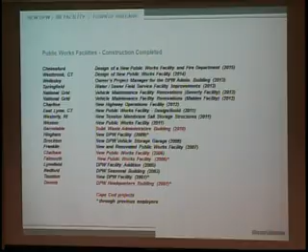And just to point out that this reflects all the municipal clients for whom we have done work regularly. When it's red, it means multiple disciplines, so you can see that our firm as a whole is fairly active on the Cape.

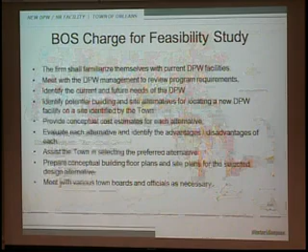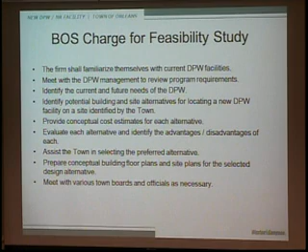The charge from the Board of Selectmen to us was to familiarize ourselves with existing conditions, develop a program which we refer to as the needs assessment, look at the available sites and identify the most logical site to develop a consolidated DPW facility, develop preliminary cost estimates, and develop some conceptual floor plans and meet with the various boards. The boards we met with, essentially we met with the Board of Selectmen on a couple of occasions. So that was the charge to us.

Again, you know this already. These are the existing facilities, Bay Ridge, Overland Way. I'll go through this with some photographs.

South Orleans, that is the address, Tom. It's 90 South Orleans Road. That's the address for the police station. The Water Department on South Orleans Road, Water Administration and facilities here in this building. And Tom's offices are across the street, and then the transfer station, and then 40 Giddiah Hill Road, which is where we spent most of our focus.

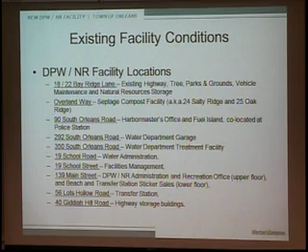That right now is sort of loosely organized with a series of miscellaneous buildings for storage.

This map is just to show you how they are scattered all around town. There are a couple of beaches that are occupied primarily or manned primarily in the summertime, but your full season facilities are literally scattered all around town, and it makes Tom's life a lot more difficult if he is to try to develop a strategic plan for managing the department in a way that's efficient and cost-effective.

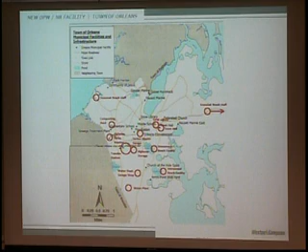That's the primary goal of our design, is to help Tom be a lot more efficient in the way he manages his staff and his resources. And it's very difficult now when you're scattered all around town.

So this is Bay Ridge, 18 and 22. Bay 18 is the small building where the parks and the beaches are. 22 is the larger building that has the highway department in it, the maintenance department, and there's a large metal building in between the two, which is shared by the two divisions, primarily for storage.

These buildings are totally inadequate. They're, in many cases, really falling apart, in need of a lot of repair, but it doesn't make sense to sink money into these because they don't meet their needs at this point.

One point I should make is that these types of buildings - this one was put up in the 1960s, I believe, is when it was constructed. They were designed for a different type of vehicle than is used today. The DPW vehicles back in the 50s and 60s were much smaller. They were generally single use. We now are dealing with much larger vehicles.

So the snow fighters have a hard time getting into those buildings, and some of his vehicles barely fit with having the door coming down. So it's basically, we run into this all the time - buildings done in the 50s and 60s are simply too small for the current vehicles.

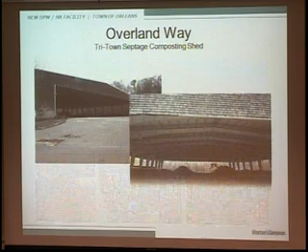Overland Way, currently informally used for some storage. It is in close proximity to a number of residences. So we did look at a proposal for reusing this as cold storage, but it was concluded that it's too close to residences, so that would be problematic.

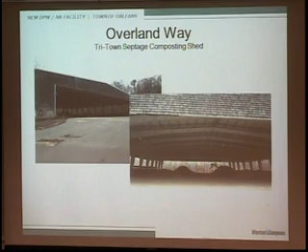The Harbor Master's facility shares the site with the police station. It's quite cramped. They do the best they can. They have one boat which they need to keep indoors, with the ability to get to the water in wintertime if there's a rescue to be made. There's a fair amount of storage and also a shop they use to maintain a lot of their equipment. It's quite tight. The fact that they're sharing space with the police station makes it quite problematic.

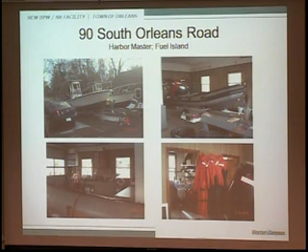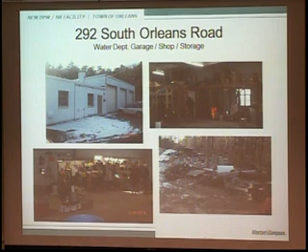The water department garage off of South Orleans Road is a single big space in this facility. We have workshops in there, the employee lunchroom, it's where they do their work. They do a decent job trying to organize it, but it really doesn't work well for them, and it's just not big enough. They mow their own facilities and cut the grass, and storage for cast iron pipe and larger pieces of equipment has to be outdoors—there's just no room for it. The water plant is really not part of our project, but just pointed it out.

Here in Town Hall, the water department is fairly well situated. They seem to have a pretty good setup there. From a management standpoint, it's unfortunate that the management is not where the workers are, because management can't keep their eye on what's going on, and it's more difficult to organize the day's activities.

Poor Ron is stuck in the assessor's office, so he really doesn't have a space to himself. It's difficult—he's got storage all around town, so that really doesn't work for him.

Across the street there are DPW offices, storage for the recreation department, storage for sticker sales, and the sticker sale room itself, which can be pretty hectic in the summertime. There are a lot of issues with the building—it's been repurposed for this use and isn't really well designed for these functions.

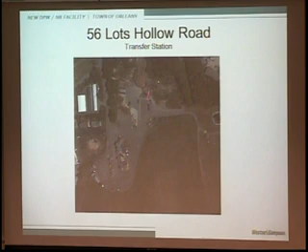Then you have the transfer station, which is part of this organization. 40 Giddiah Hill is actually over here. So just to reorient you, you come in here, and then there's where you turn around and put your stuff in. These are the buildings they have at Giddiah Hill, used by the highway department.

Some are literally sheds that are up on blocks, and some of them are permanent buildings. But in all cases, you can see there's been a lot of Rube Goldberg type accommodations in order to make things work for the staff.

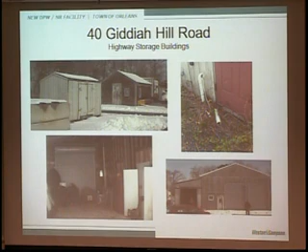The picture on the upper right is the garage across the way. So the staff, before they paved that parking lot however many years ago, ran PVC under the pavement from one building to the other and ran an extension cord through it so they could get power from one location to another. Now, how much can you run off an extension cord? Maybe a small hand drill and a radio, that's about it. So this is the type of Rube Goldberg stuff that has gone on—there's a lot of this around, and it's really, I hate to say it, kudos to the staff just trying to survive and get the job done.

So this is, I'm sorry—is that due to budget, that they did things like that?

Who knows? I mean, there's been no attention to the facilities, there's no budget for the facility, really, to do something. I'll tell you right now, while you asked that question, the parks down at Bay Ridge Lane is a blue metal building that's shared half by highway and half by parks.

So the back part by parks is heated—we heat it because they do a lot of indoor work. They maintain the lifeguard stands in the winter and do a lot of work there. Right now, that heat is broken.

We're trying to get parts to wrap it up, but it's probably like a $3,500 repair. For the last month or so, they've been heating it with a propane heater just to keep things alive. Some of the heaters—I forget the trade name—what do you call the overhead heaters, Mike?

Infrared? Not the infrared, the one that blows. Modines? Modines, thank you, yeah.

So we got a few of those in the garage, right? Well, one doesn't work at all, the other one doesn't work right, so it's on, off, extremely inefficient. I can go on for days about the condition of the existing equipment.

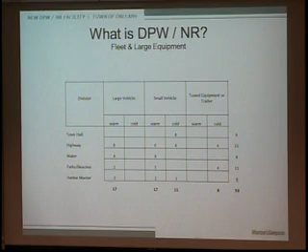One of the things I'll add, we are an emergency response operation. Right now, the immense majority of our fleet is outdoors because we don't have any room. We might keep a few, like the loader indoors because we want that to start and go. When the snow's falling, you gotta go outside, so you might have the loader indoors, maybe one sander and a couple of pickups. But basically, everything's outdoors.

I watched my guys struggle last year hooking up plows. You are wasting man hours like you can't imagine, particularly when the snow's falling and you need us out there. I saw my guys fight with one plow for 20 minutes last year, and it's like, you got to be kidding me. And it's because they're outdoors. In the middle of a blizzard, snow flying, they're going from a sanding operation to a plowing operation, but the key is, it's public safety. Every minute counts.

Another point to make is that pretty much every one of our DPW facilities has a warm garage for their larger vehicles. One of the benefits, most of them have center aisle angle parking, so every vehicle has a parking space. When there's a snowstorm coming, they put the sand and salt in the vehicle, they park it, it's ready to go. The staff come in, get into their truck, and off they go.

You can't put salt and sand into a vehicle if it's going to sit outdoors, if it's going to get rained and snowed on, because that's going to freeze and break the spreader. Because there's a chain device that pulls it through, it'll break it.

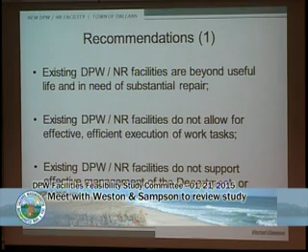So our recommendations are as follows. As I said, the existing facilities are beyond their useful life and in need of substantial repair.

It's not worth the money. It's not a wise investment to put any money into them. They don't allow staff to work effectively.

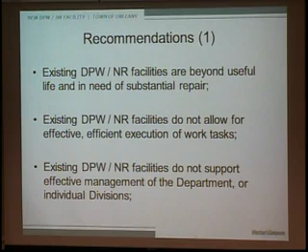That's quite simple, they don't support effective management of the department. Tom has an extraordinarily difficult charge in front of him in order to manage department divisions that are spread all around town. None of the existing sites is large enough to house a consolidated department except for 40 Giddiah Hill, which we can't fit everything there, but most of it we can fit.

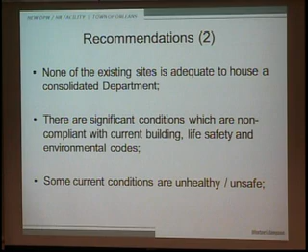There are significant conditions of non-compliance with current codes, you have building code violations, life safety violations, environmental violations, pretty much on every site. In some cases, particularly the highway maintenance garage, it's unsafe. There was one case because they have an emergency generator indoors. One winter storm not too long ago, one of the drivers came back and found the mechanic was woozy from carbon monoxide poisoning. So it's just simply unhealthy.

We also looked at all of the available commercial sites in mid-2014, and the list is in the book. They're either too small, in inappropriate locations, have abutter problems, or zoning problems. One of the benefits of Giddiah Hill is that it's in the industrial zone, and I've checked with all of the various departments here in town, and planning has agreed there are no issues there. We can put this facility there and you don't have any issues, and there's no environmental issues either.

So our recommendation is that 40 Giddiah Hill Road be developed as the core facility.

Another benefit is it's next door to the transfer station, so we can actually connect the two via roadways, so that becomes basically backdoor redundancy. So if there's a problem on Giddiah Hill Road, the staff can access the highway system through the transfer station. There's also potential for sharing of the transfer station site for bulk material storage, potential for sharing of staff between the various divisions, and there's a lack of environmental, abutter, or zoning issues there.

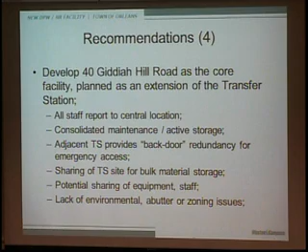We also recommend that we take down the Bay Ridge Lane structures. As we said, they're beyond their useful life. Our initial recommendation in the report was to construct a cold storage building on that site, which would be used for off-season storage of vehicles and equipment.

And as I said before, at this point we have no planned use of Overland Way, principally because of its proximity to private homes. And whose concern is that? Who are the individuals that are concerned?

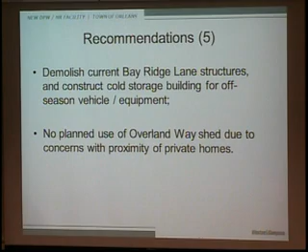Just the Board of Selectmen. The Board of Selectmen was concerned? Yeah, there was a comment by the Board of- and John, please jump in. There was a conversation with the Board of Selectmen during some of our presentations. There was no official vote taken by the Board of Selectmen, but there was conversation by the Board of Selectmen not to use it.

And it actually wasn't just private homes, it's also right next to Tri-Town, and there could be potential use for that site for a sewer program. So it's like, let's stay away from it. That was the feel, and if you want to jump in.

Yeah, there were two ideas on that. One is enclose the building that's there because it's structurally sound, and use that for cold storage. That was one idea. The other idea, because of the proximity to private property and the amount of potential noise, maybe we'd abandon that, but we have not discussed taking that building down or doing anything with it at this time, other than- I think we're storing gravel and stuff like that in it now to have some use. But that decision hasn't been made by the Board of Selectmen.

And Mike, thanks, that's really helpful. Mike, you saw that building, and that building has integrity, right? It's not- Yes, I mean, pretty simple. I walked through it myself and measured it, and I'm convinced that one could spend some money on it. A few bucks. I forget what the number was, but not too much to enclose it.

I was just going to enclose it basically in almost like chain link, but you could store a lot of stuff. It's a very substantial structure, and it could be very useful, but it's near homes and it is a magnet for kids. It's got a lot of graffiti on it right now. So I guess that was another concern, was it going to be even more of a magnet if there are trucks there. Just buy a dog.

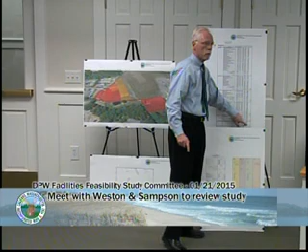The feeling at this point is that this represents an efficient program for your 8 divisions. We don't believe we've made any compromises that are going to impact operations negatively. But I was just anxious that you understand the kind of due diligence that we went through to get to the point where we are now.

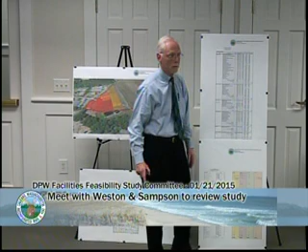Mike, what's industry standard atop? It says industry standard and then as developed. Industry standard meaning that comes out of, when we hear from the superintendent of the water department that he needs a workshop, we, based on what we've done for the last 10 years, have a sense that's basically a 600 square foot shop, or going back to our records of what has been built by other DPWs. We have Roger Thompson on our team, and he does this stuff in the Midwest as well, so that industry standard is our assessment of what is being built out there these days.

Is that 45,000 number, I noticed in your presentation, there's a lot of modular schematics for different functions. Is that 45,000 number reflective of the schematics of individual rooms? Right, that's what generates the 60,000. Okay, so then we went back to that, and we took some out, we squeezed them, and that's where we started. That was the starting point. But it's not—I'm trying to illustrate the process.

As I mentioned, this is our recommendation for a master plan, and that's a core facility at Giddiah Hill Road. This is Giddiah Hill Road here. So I think Nauset refuse is in here, I think.

This is where the Highway Department currently has a collection of buildings that we talked about. This is the detention basin that exists right now, which drains the cap from the landfill. This is the landfill, that's the transfer station, this is the gift house, and this is the area behind the gift house that's paved right now where they do some of the composting.

Our recommendation is, we went through a series of conceptual layouts, which I believe I put into the report, and this is the one that made the most sense to us. So you have an administrative wing here, where all the management and supervisors are located, the administrative staff are located. It's also where citizens would go if they need to do business with DPW, where folks would go to buy their stickers. And then we have this wing being the vehicle maintenance shop on the opposite side, and this right here is where the trade shops are going to be.

And then this building is the warm storage for vehicles. It's a center aisle with angle parking, you can see it in the plan. And then this little bump out is the vehicle wash bay. So you go in this side, wash, come out that back side, turn around and go back into the storage area. So what we've created here is a reasonable parking area that's exposed onto the street, so the building has a front to Giddiah Hill.

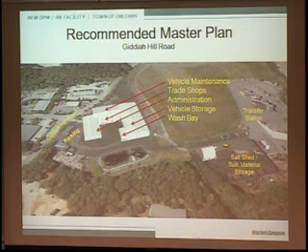Would the retention basin stay in the same location? No, we'd have to relocate it. Okay, move it over a bit. Yep, it changes shape from a rectangular to a triangular one. And actually it's not a bad thing, it does not function very well at this point, it's pretty silted up. I would think you could move it to an outer edge of the site and make better use of the space. Exactly, we slide it over, you just get it out of our way, but it actually needs maintenance at this point now.

And part of the proposed scheme, which is in the report, is, as I mentioned, we take down all the buildings at Bay Ridge Lane, and we put up a single pre-engineered metal building for cold storage. In this scheme, it's also center entrance with angle parking on either side. We can make modifications to that, but this was the initial scheme.

Yes, sir. Mike, what was the cost for that part of the project?

$1.3 million, for that building and for all the site work? No, that's just the building itself. And I have site work for that at being roughly $250,000 plus, $75,000 for demo of the buildings, plus that water shop is separate. Yes, it's all in here.

I should mention, when I say pre-engineered metal building, I'm talking about what some people call modular, but not really modular. Pre-engineered metal buildings are factory manufactured pieces. There's a large structural bent, which is long span, which is what we need. That building is 95 feet wide, and then you have rolled sections for roof panels and insulated wall panels. It's about 30% less expensive than traditional construction, and we're proposing the entire project be done that way.

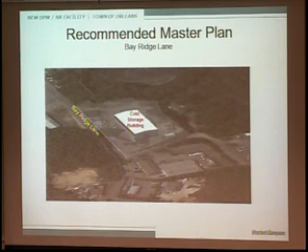Okay, great. If I may, the chair is having some conversation and questions about this. I'll bring this out, something I'd present to the committee in the future. First, the presentations that I've done and that Mike has done, I think we've been in front of the Board of Selectmen three times talking about the project, and we went through several iterations. For example, with Overland Way, we had an initial proposal to spend a little bit of money on it and take advantage of the 40,000 square feet. But again, this whole process is iterative. We're here to have a conversation, look at the best options, bounce out ideas, look at costs, and ultimately the town meeting makes a decision on what's best for the town.

But for Overland Way, just stating facts, when we looked at one of the first designs and Mike costed it out, we had about, in round numbers, $284 per square foot for the entire project across the three phases you can see over there, which we haven't talked about yet. But when we brought Overland Way into the mix and gained another 40,000 square feet at low cost, it drove the entire project cost down to $174 a square foot. So you take about a quarter to a third off your total project cost by utilizing Overland Way. We did present that, and we did talk about it.

Metal roofs—I want to emphasize what Tom just said, that this is a point in time. This is an iterative process, and I'm certainly not here to tell you this is the way to do it. These are ideas. What we're looking for is feedback from you, but we haven't stopped thinking either, so we have more ideas going forward.

I think all of us appreciate just how much work you all put into this. Sorry to come in the middle, but it's a lot of work. But we're glad that you're here—well, thanks—because you're going to sell the job for us.

I'm always nervous with my pickup coming out of here, worried about getting hit by somebody coming out there. But if this whole entrance could be changed around and made a lot more effective, it means the transfer station staff and DPW staff would have ready access to all kinds of additional land, which would make this end of the transfer station work a lot better.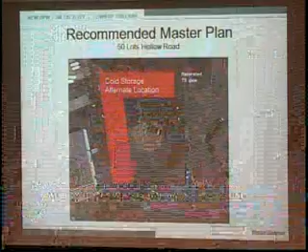So that's my ultimate thought: if this were able to work, then you don't need to hold on to Bay Ridge, and that could pay for at least a portion of the purchase of this. Getting back to the question...

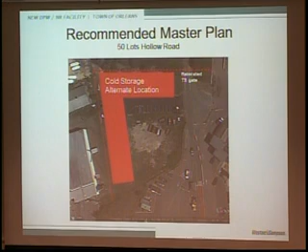In your proposal for using the existing Bay Ridge site for cold storage—yes—is that site going to be fully explored for any issues that way? You mean, are we going to do a hazmat investigation? Right, we'd have to. So that's budgeted within what you proposed here? Yep, okay.

But frankly, I'm not presuming in my budgets that there are environmental issues that have to be mitigated, because I have a report that says they already took care of that, and the tank has been taken out of the ground so there aren't any more underground storage tanks there—at least that's my understanding. We're doing a feasibility study, using the best information we can readily put together to come up with these cost estimates. So at this level of planning, we're making some assumptions.

It's not until you fund, say, $500,000 for the first part of design that you're going to get into exploring the site and all that, unless you do some earlier funding for testing. When we get into the design portion of this project, presuming we get that far, we would do a boring program for geotechnical purposes, but it would also turn up any environmental issues. If a decision is made to use Bay Ridge Lane as part of this project, we would do a boring program there as well.

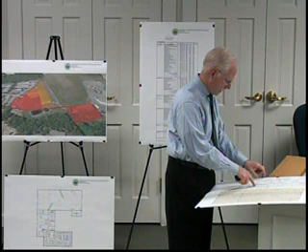Before we add contractor markup, it's $15 a square foot for the specialty foundations, for the 45,000 square feet. So you're talking about 600,000 to 700,000 bucks?

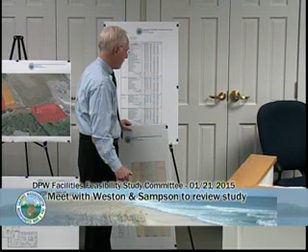Yep. The only thing about the site is there's a couple other things - they're going to move the detention pond. You already own it, so that's advantageous.

The other thing, about the thought process of the wash bay, the temporary wash bay - Mike and I talked about that. We're going to reuse the equipment. You want to put the pointer on the orange?

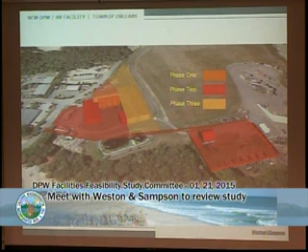So there's the shell of the future shops. We'll use some of that immediately for shops - it's just not finished the way it ultimately will be at a later phase. We'd put a temporary wash bay facility in there with the equipment, then in the subsequent phase build a new shell for the permanent facility and move the hardware into it. So we're not totally redoing it.

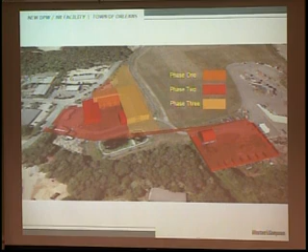Is it less cost-effective? Yes. Mike can show you the cost of doing the whole project at once versus breaking it into phases - it costs you more money, that's the way it is. But we're trying to live within what the town can afford, based on the guidance of the selectmen, and figure out how we can get there over time. That's why you guys are here, to help us with that.

You might think, let's do the wash bay now - I'm not going to argue. Why is the wash bay in phase one? Because right now we are in non-compliance, we have a problem, we have to fix that. So we're looking at the most drastic need and working our way out from it.

Going further - I just have a question. The retention pond, does that get modified in phase two or phase three? Phase two. So that's a significant cost issue. Yep.

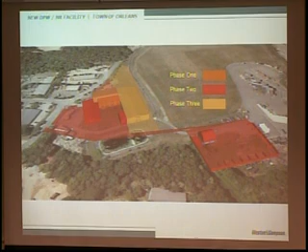I'm going to throw a comment real quick - it's a big project, there's a lot to talk about, that's why we're here. But a lot of questions come up about the vehicles and what's the right thing to do. One of the approaches Mike and we took through this process is that every piece is self-supportive. We need a vehicle maintenance facility, there's no question, we need it desperately. That's the first part we're going to do - a vehicle maintenance facility, which is what we initially were talking about bringing to town meeting last year, because there's a need.

Stop right there. I mean, that might not be the right thing to do, the town's probably gonna want to do more at some point, but each piece is fully self-supportive, it serves a purpose. None of it's a waste.

So we can sit here and debate whether we heat the vehicles or not for 6 months, but are we gonna go for that at the next town meeting? I know the Board of Selectmen want a plan, and I agree we should have one. I've done projects myself where I phase it, but I get a plan so phase 1 fits with phase 6. It all comes together, and we need to get that done. But we don't have to kill vehicle maintenance because we're debating whether or not we house cars.

Yeah, good points, trucks, that's all. But we'll give you all the data, trust me, we want to give you it all. Okay. Good.

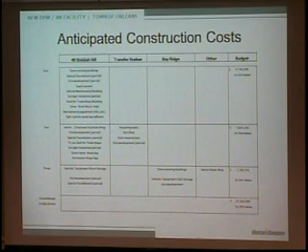So if these 3 phases are phased like that, it's $19.5 million. But if Phase 2 is put off for another year, it's going to be more, and Phase 3 too - the longer you wait, the more expensive it is because of the escalation of construction costs. But that $19.5 million as 3 phases compares to $15.5 million if you do it in 1 phase in today's dollars. So I understand the logic behind phasing, and as a taxpayer I appreciate that, but the fact is you pay more if you do it in phases than if you did it in 1 phase.

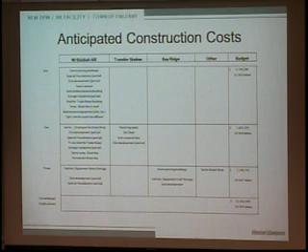So I just wanted to explain how we went about the conceptual budgeting strategy. We keep a database based on recent bid results, and we had 4 bids come in the first 2 quarters of 2014. So we developed square foot values for the type of enclosure - the admin area has a certain dollar per square foot value, the trade shop area has a certain dollar per square foot value, the vehicle storage has a certain dollar per square foot value. The most expensive is the vehicle maintenance because it's got a lot of equipment and a high amount of plumbing in the floor and ventilation by code.

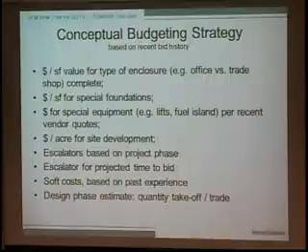And then for equipment, we actually price that separately from vendors - we price the lifts, the fluid distribution systems, the wash equipment, all that comes from recent vendor quotes. And then we have a dollar per acre value for site developments, roughly $350,000 to $375,000 per acre, based on our experience doing these types of facilities. So that's how we have a spreadsheet we plug these areas into, and then we provide escalators - escalation if it's next year or 2 years later, where the design is. If we're at a conceptual phase, we're adding 10% design contingency, and probably a 6% construction contingency, depending on the site.

And I mentioned this, we also add additional costs for specialty foundations, for demolition, all those things we have numbers in, and it's in the spreadsheet that I'm providing in the report. Then we provide an estimate of soft costs, such as your construction escalator, but also some of your own costs, like legal costs for bidding, printing, and things of that sort.

If I can add to what Mike's talking about, one of the reasons why we put an RFP out and interviewed architects, and one of the reasons why we picked Weston and Sampson, was because of their experience. You saw the list of projects. These guys have all that data. They know what DPW projects are costing in the Commonwealth of Massachusetts up to date now, and they have all these costs on spreadsheets. So whether you like the numbers or not, Mike can show you bids - here's what it cost over in Bourne, here's what it cost over here. He can show you those numbers.

One thing I wanted to point out is that these projects go all the way back to the Dennis facility, which was done at Gannett Fleming - Jeff Alberti was working there. Relatively small facility, 28,000 square feet, the average bid price per square foot was $96 back in 2000. Bourne has an average price of $283 per square foot for a facility that's 40,000 square feet, bid in February of this last year, almost a year ago. So this shows the escalation of costs over the last 15 years.